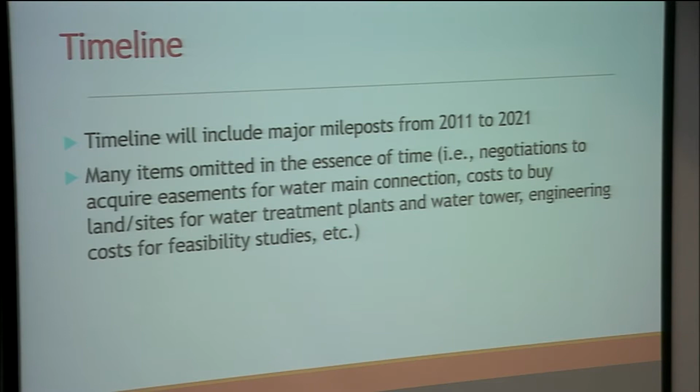So the timeline will be including kind of the major mileposts from 2011 up to the current date of 2021. I've omitted a bunch of stuff in here, and it's not that it's not important, but it's just not the major mileposts, you know. Dollar amounts that we spent to buy land for where the water treatment plants are and that kind of stuff, feasibility studies. I kind of passed over all that.

We did an update to the comprehensive water plan back in July of 2011, so virtually 10 years ago. And at that council meeting in July, I just did a screen grab of one of the maps on there. It shows a couple of things. It shows a water treatment plant, a well, and a water tower in the southwest part of Minnetrista, not actually too far from where we ended up. And it also shows a future water treatment plant on Kings Point Road, which eventually did get built.

Let me get this up here. Will you be coming back to that? I can, but we'll see. We just started. Is there a connection between that proposed tower for St. Bonnie and the one that's on Kings Point? This is not about St. Bonnie's water tower. No, there's no. This is the city of Minnetrista's proposed water plan update back in 2011.

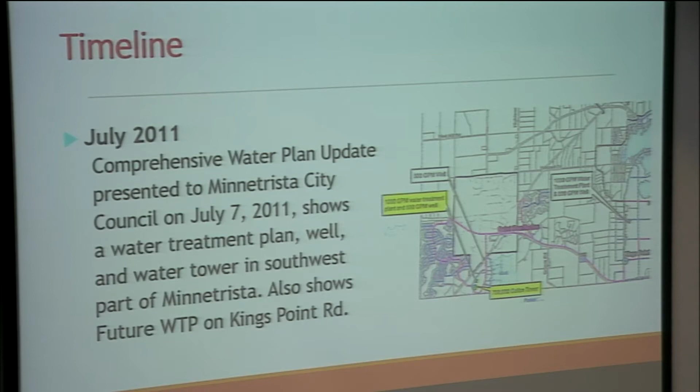It did show that we were, I'm not trying to. Yeah, no, but I'm just saying that was our plan all along, to build the stuff that you see going in down there right now. And we did talk to St. Bonnie at a certain point in time, and they were not interested in working together on water infrastructure. Well, I'm on the city side. I knew some kind of connection between the St. Bonnie water tower and the city.

Let's go through the presentation. Yeah. That's okay. I understand. Yeah, then it may become a little clearer as we move forward. Yeah. And if you still have the question, let us know.

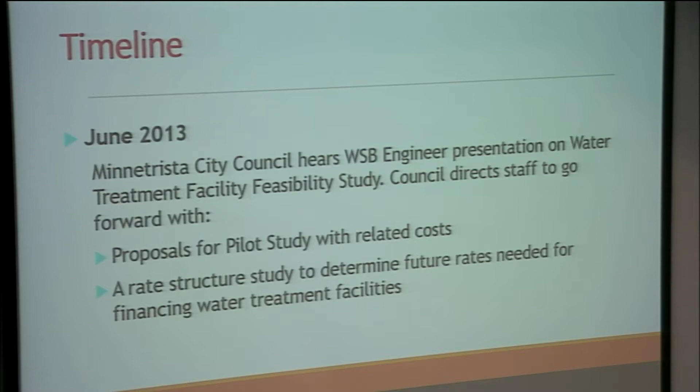So in June of 2013, the council heard from WSB engineers at the time that did a presentation on the water treatment facility feasibility study, and the council directed staff to go forward with a pilot study and costs and a rate structure to determine how to pay for those future costs, which would be the infrastructure.

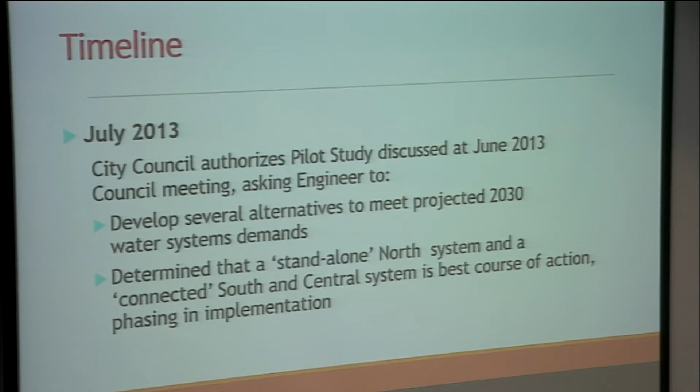In July of 2013, the council authorized the study discussed at the June meeting, and asked the engineers to develop some alternatives to meet the projected 2030 water system demands, and it was determined at that time that a standalone north system and a connected south and central system would be the best course of action, which is in fact what we did. There were a few twists and turns, as you'll see.

In 2013, for the north system, it was determined by the engineers that there was sufficient existing capacity and storage, and it could support itself. Whereas in the south and central system, there was a need for some additional capacity and storage overall, mostly due to firefighting. And those two systems were where we got most of our complaints on the drinking water quality.

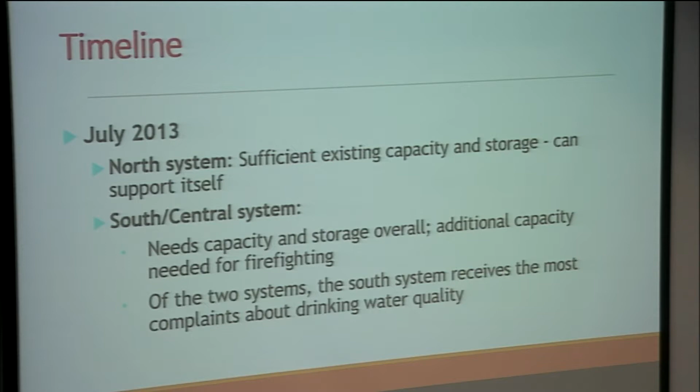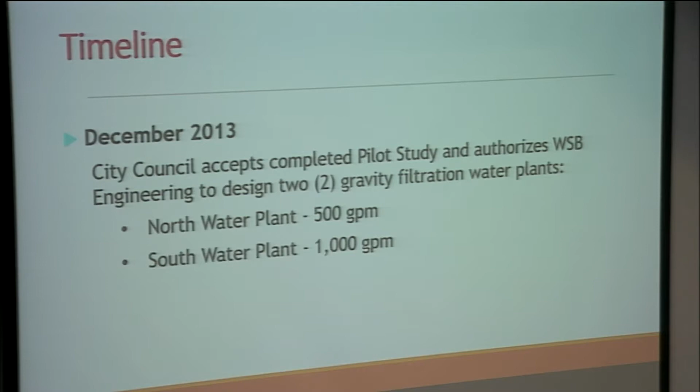In December of 2013, they accepted the pilot study and authorized WSB to design two gravity filtration plants, the north system and the south water plant being a little larger.

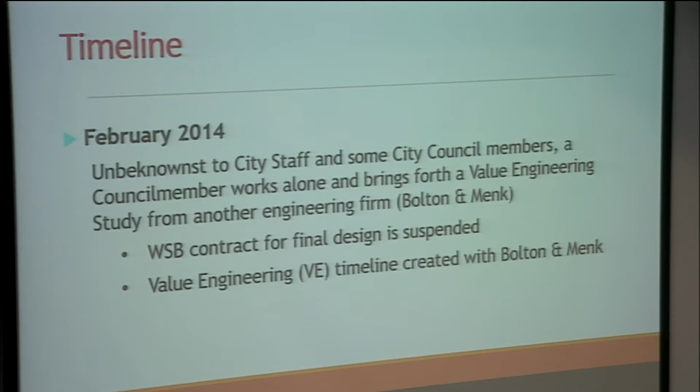And then in February of 2014, unbeknownst to our city staff and a few members of the city council, one council member working alone brought forth what was called a value engineering study from a completely different engineering firm, Bolton and Menk. They suspended the contract for final design for WSB, and then the value engineering timeline was created with Bolton and Menk. And I'm purposely not delving into the politics related to that, but that's actually what did happen.

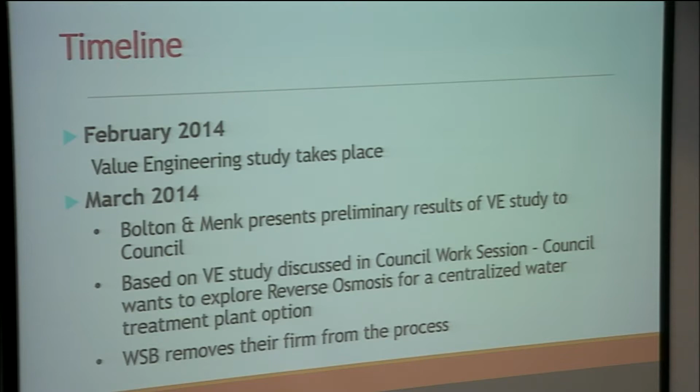So there was a value engineering study in February of 2014, and then in March they presented a preliminary results of a value engineering study to the council. And the council at that point decided that they wanted to explore a reverse osmosis plant for a centralized, which means one plant only. And it actually is going to be down the road from here at City Hall. And then at that point, WSB kind of removed themselves from our process, since they're our city engineer and still are, and they were tasked with the design and implementation of the water infrastructure, but like I said, a council member overruled that. We had an election in November.

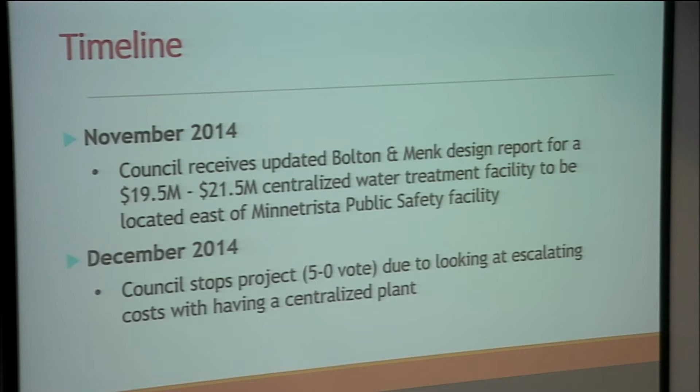The council during November also received an update from Bolton and Menk, and they were now reporting a $19.5 to $21.5 million centralized water treatment plant to be located east of the public safety facility here. But after the election of Mayor Whalen and 2 other council members, the council stopped the project because of the escalating costs, and I'll have something at the end about the costs. So in January, with a new council seated, they began re-examining the issue once again. And so the council decided to move forward with an RFP to deal with the city's water system improvements that needed to be done. And we started our search for a water tower site, which is important to note.

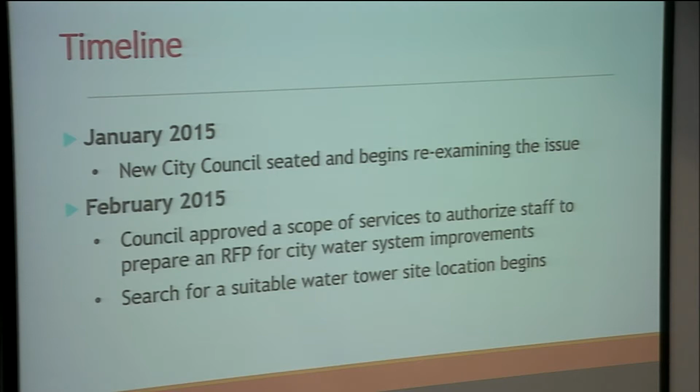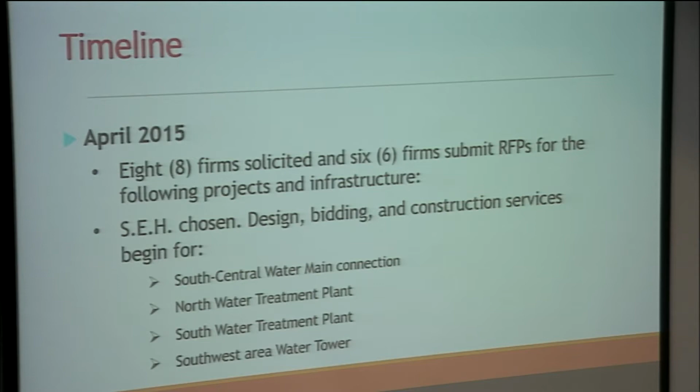So there were 8 firms that were solicited, 6 submitted RFPs for the following projects. SEH was chosen. They're still in the process of finishing up with them. This is 6 years ago. They did the South Central water main connection, helped design the water treatment plants, both the north and south, and then the current and final piece of the puzzle is the southwest area water tower that's going to be online here in fourth quarter. So in July of 16, the south and central water main was connected, and the cost was about $3 million, which included all the right-of-way purchasing, which was minimal since they were decentralized plants, not a centralized plant.

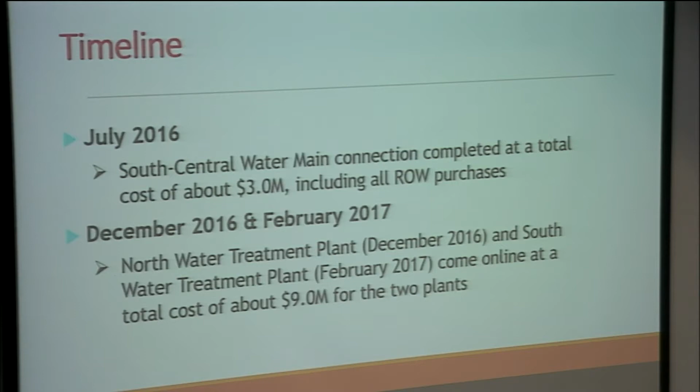In December of 16 and Feb of 17, the 2 water plants came on. North plant came on in December and the south plant in Feb. The total cost was about $9 million for the 2 plants, and those again were gravity filtration plants, not reverse osmosis. And we did have a delay in trying to find a suitable location for a water tower. That was difficult to do. David Abel could tell you more details about that, but in general, we explored many different sites.

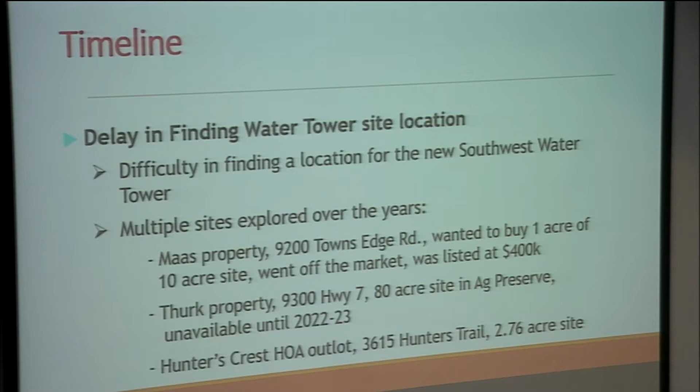One was the Maas property. We wanted to buy an acre there. It was listed at $400,000 for that 1 acre. The Thurk property was in what was called Ag Preserve, and it wasn't going to be available. This is back in 2017, so this is 5-6 years later. It wasn't going to be available for that long of a period, so that got ruled out. There's an outlot in Hunter's Crest, a 2.76 acre site that did not work out. Hunter's Pass, there was a property owned by the Klinkner family. They would not discuss selling a piece of their property with us.

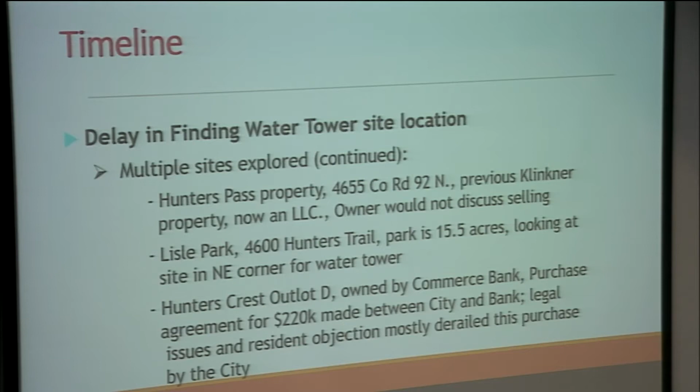Lisle Park was kind of our fallback position since we were getting frustrated trying to find a location. That's a 15.5 acre park. We really didn't want to use it, but if we couldn't find a spot, that's where we were going to put it. We actually had a purchase agreement with Commerce Bank, who owned an outlot called Outlot D. And because of some legal issues with the covenants and the Hunter's Crest HOA, and also some intense resident objection to having to live near a water tower, that purchase got derailed and we did not go through with it. We finally did purchase a tract of land at 9400 Highway 7. We bought a 2 acre site and it cost us about $100,000.

At that point, we began the construction of the water tower. One of the most important things about building a water tower is painting it, and depending on when you start, you may or may not be able to avoid the winter break. We were not able to. So it was 27 total months. It's actually 20 months of construction, and we had to sit out 7 months from November of last year to May of this year, where you can't do anything for painting, et cetera. So that water tower will go online at the end of October, and it'll cost about $2.5 million.

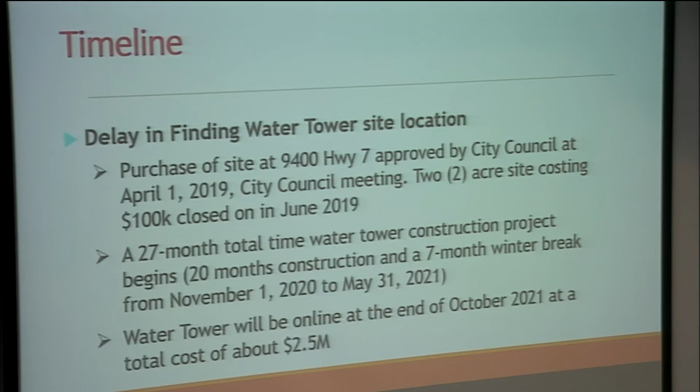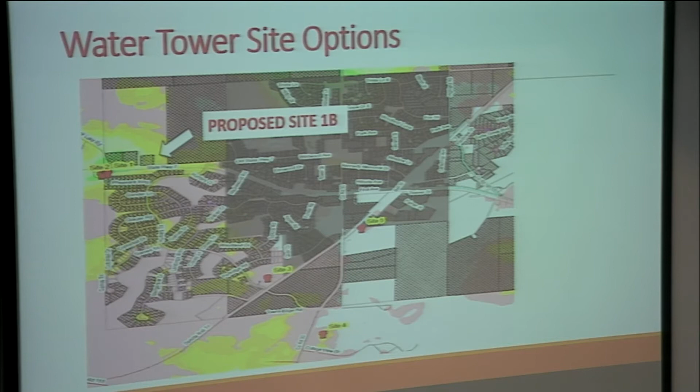This is just kind of a graphic. You can see there's proposed site 1B, right next to 1, and then you've got site 3, site 4, site 5. There was a whole bunch of sites that we looked at. That's actually an aerial view of the current site.

These were the costs that the engineers provided back in the day. Site 1B is the one that got selected. As you can see, it was one of the two shorter water main connection lengths. That's in the second column there, only 1,100 feet, and that's important because there's a lot of cost to connecting the water tower with the water main.

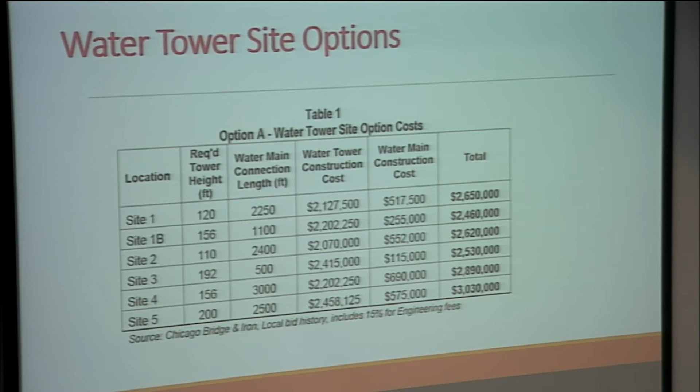And it was also only 156 feet high. The shortest connection was 500 feet, but the tower, based on the topography of the land, had to be 192 foot high. So it was actually the least expensive option, which is why we built and bought that 2-acre site. And this is just some options. The most important things are the land availability and proximity to the 12-inch trunk main. And you can see the X's on those two that were the two lowest cost ones.

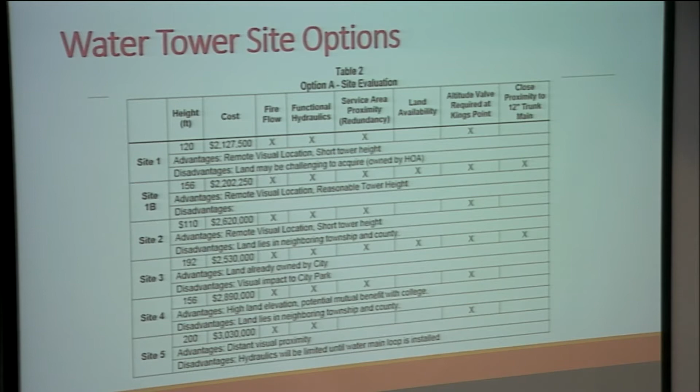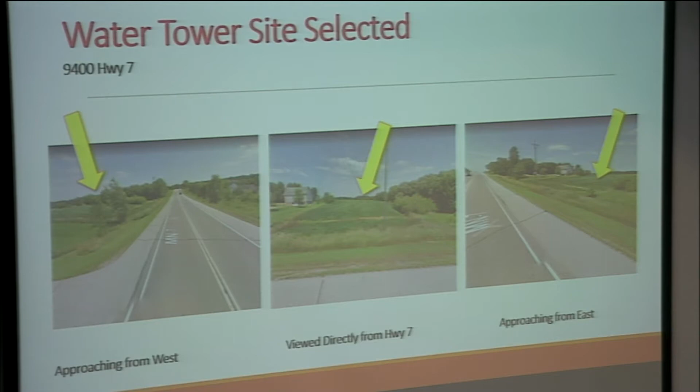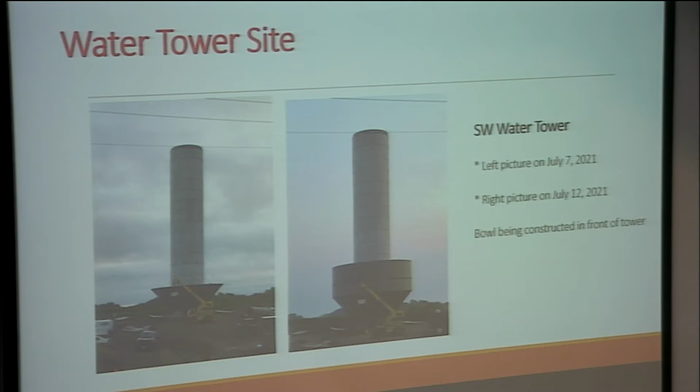This is just 3 pictures of it approaching from the west, directly dead on, and then from the east of where the water tower is now being constructed. This is a look as of about a week or so ago. The left picture, you can see the cone, the top is being built on the ground, and that'll be raised up here sometime in August and put on top of the tower.

So I did talk about cost a little earlier. The original plan before 2015, which is when the new council was seated, was a centralized water treatment plant. That was 19.5 and growing to 21.5. We didn't really know the cost of the right-of-way acquisition, but it was going to be quite expensive because you'd have to buy right-of-way between a lot of different parcels to get all this stuff down to one location, whereas we're using 2 locations. That was a $24 million and growing price tag, and the current plan is at $14.5 million.

Again, the water tower is going to be built on both plans, but in general, it was the cost of building the plants. So council made the right decision. That was our original intention back in 2011, which is where I started this PowerPoint. And again, like I said, there were a few other people that wanted to do something different for a while, and it basically just came out that it wasn't the right thing to do financially.

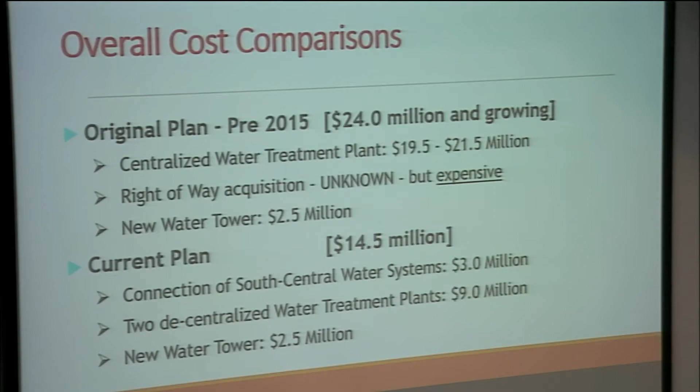So that's what I have as far as a PowerPoint goes, to give a quick historical background of our water infrastructure. At this point, I'm going to ask Allison, and Greg eventually is going to jump in here and talk a little bit about the water supply and treatment and where we're going. So you know where we've been and where we're at today, and now where we're going is the next steps. Allison?

Thank you, Mike. Madam Mayor, members of the council. This evening we have Greg Johnson. He's the director of our water wastewater group. I asked Greg to attend this evening; he and I both felt it was really important to have his expertise at the meeting. I can provide an overview of how the city plans for water infrastructure, the process to look at where we're at with our water supply. But Greg's really the expert in this, and he'll be presenting part of this this evening to give the council a background on some of our projections.

So moving forward, I wanted to give an overview of what this presentation will cover. We'll take a look at the south system and what the city has as far as water plans. There are a couple documents that we reference regularly for infrastructure planning. We'll look at some of our recent water usages, as well as the restrictions implemented this summer, and talk a little about the impact of weather. Then Greg will take over looking at supply and infrastructure trigger charts, what consumption has been to date and the projections for the next few years as far as infrastructure needs in the city.

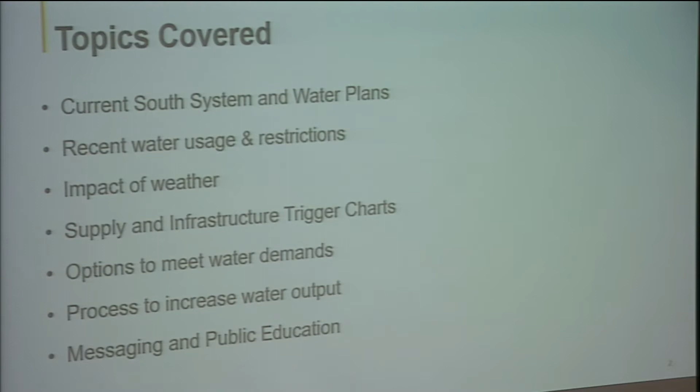And then we'll move on to look at some options to meet the demand of the water, the process to increase the output or to increase the amount of water into the water system to the residents of Minnetrista. And we'll talk a little bit about messaging and public education to the residents of Minnetrista. So this is the south system.

You can see it generally lies in the north and south Saunders areas, where well 5 is at the top of the slide there. That well came in service in '99. Once the south tower and water treatment plant came online, that well has only been used as a backup, and that's typical in a city. So we have both well 4 and 5 as backup wells. And the reason that they're backup is due to aesthetic issues. So they're higher in iron and manganese.

And so while they're safe to drink, any color in the water, any odor, any taste is not palatable to a lot of residents. And so the city identifies that, yes, that's not palatable, so we'll use those as a backup in an emergency. Again, the challenge is that when those don't go through the water treatment plant, they're not treated for that iron and manganese, it generates a lot of calls from residents, and so there's a balance with that. We also have well 3 within that system. That's off County Road 44.

As Mr. Barone pointed out, we have the new water tower under construction, and then the Kings Point Road water tower and wells 6 and 7 at the water treatment plant site off Kings Point Road.

Just a quick question. Is this new tower a part of the system or not? Yes. And it's in St. Bonifacius, right? No, it's in Minnetrista. It's in Minnetrista, yeah. I'm seeing St. Bonnie there and I'm wondering. Yeah, Minnetrista surrounds St. Bonnie. So you have to go through St. Bonnie before you get to the water tower. I was given to understand earlier that that wasn't going to be a part of the system. No, it is, yeah.

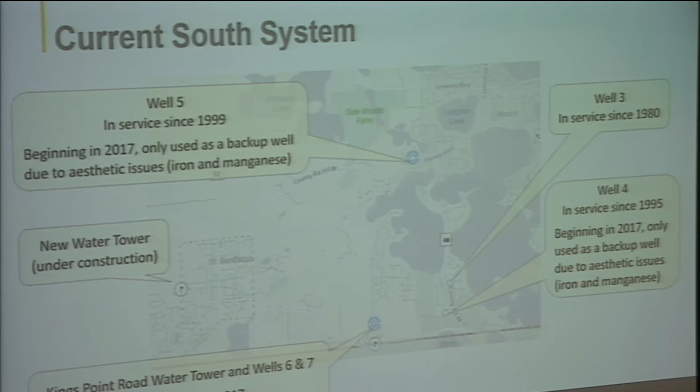So when we look at the planning documents that the city has in place with regards to water infrastructure, there are two components to that. One is the comprehensive plan, which was recently updated. And then we also have a water supply plan. And both those documents look at the city's growth, so where the population is at the time, and the projected growth, both with city staff and Met Council. And we look at that information to make some projections on what type of improvements will be necessary and when.

So we look at, for example, an average daily demand. I was thinking about this earlier today: your electricity use in the winter is a lot lower than it is in the summer because you don't have your air conditioner running. So likewise with a water supply system, you have your average demand, which is what you would use for showering, washing, etc. But then you have a peak demand that comes up in the summertime, and that's when we have irrigation. And so when we look at average versus peak, you have a multiplier from your average to get to your peak, so that we can plan the water system.

So as I mentioned previously, in the comprehensive plan and the water supply plan, we were looking at the use of wells 4 and 5 to help during those peak periods when you have a lot of people irrigating and it's hot. However, with the dissatisfaction with that water quality, there's a lot of challenges in bringing those wells online. In fact, I didn't bring it in here, but I had one of our public works employees today bring me a sample from well 3, which is the better well of 3, 4, and 5, and it was cloudy. And again, it's safe, but it's a palate issue with the consumer of the water.

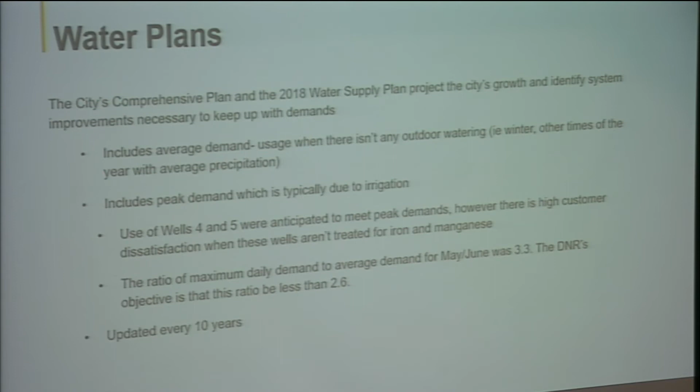So when we look at the difference between an average day and a peak day, in Minnetrista we were seeing this year a 3.3 multiplier. So at our peak, we were seeing 3.3 times the demand for water in the spring than in the winter. When we look at our water supply plan, which goes through the Department of Natural Resources, the DNR's threshold says that you should be around 2.6 for a multiplier. So we're seeing a higher than anticipated, per the DNR, irrigation demand on the city of Minnetrista system. So we look at those plans about every 10 years just to make sure that our projections are accurate and make adjustments as necessary.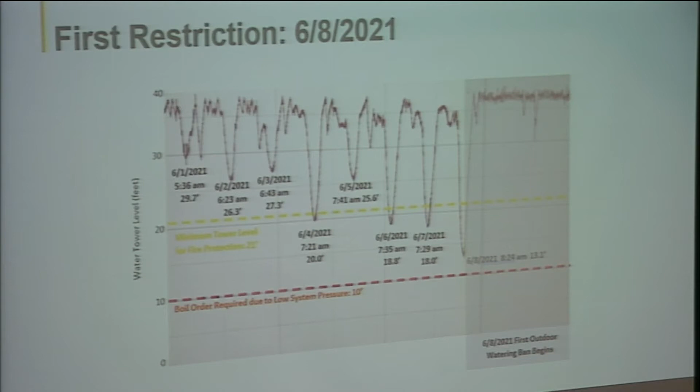Which tower is that? That is from the Kings Point Tower. So Kings Point is the only tower that serves that south system currently. And just for clarification, the south system also serves our central district. They're connected, so South Saunders area, North Saunders area, the Pinnacle Way, those are all connected to this system as well. Okay. Thank you.

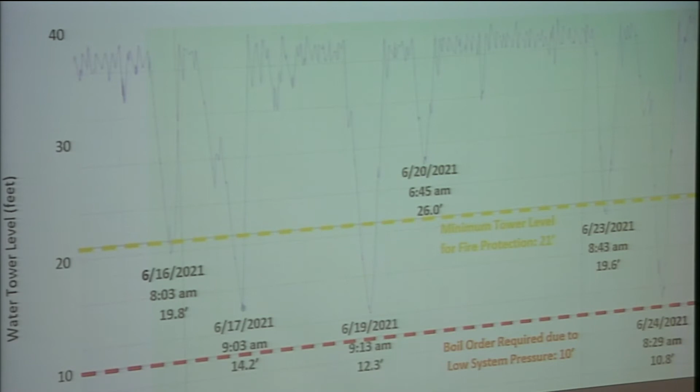Thank you, Madam Mayor. So this graphic, again, shows that threshold at 21 feet and 10 feet once we got the revised watering schedule in place. So the revised schedule, instead of allowing irrigation every other day, allowed each resident on the city system to irrigate 2 days a week. And what we saw is, again, the water tower elevations dropping below that 21-foot threshold. And then on June 24th, on the right-hand side of the screen, we saw it drop to 10.8 feet.

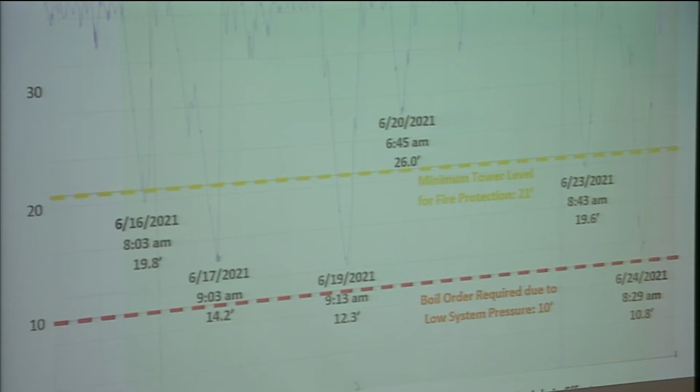And that's when the restriction went back on again based on what we were seeing for the demand on these towers. I can remember on the 16th, the first day that the modified schedule was released, Superintendent Peters texted me and told me what the tower elevation was only 7 hours after the restriction was lifted, and it had dropped significantly. Understandably, people were ready to start irrigating, but it dropped that tower elevation very significantly on the first day, and we weren't really seeing it recover as this graphic shows.

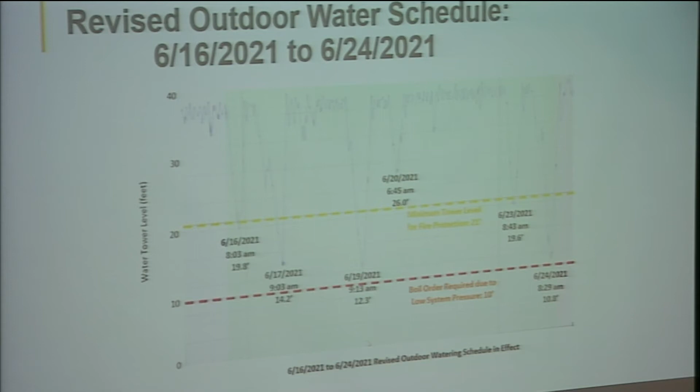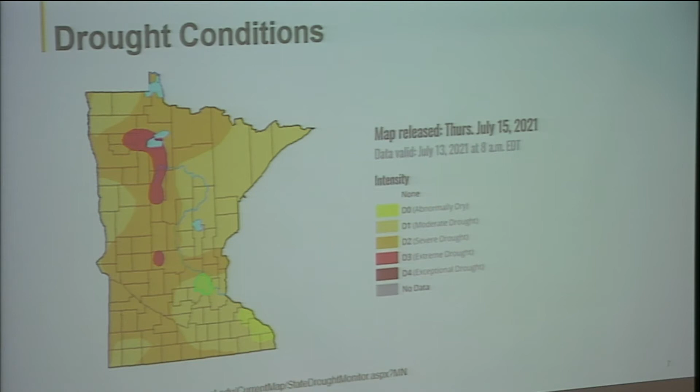So we are in a drought. This information was the latest that I found last week when I was putting the presentation together. The map was based on data from the 13th. I am not a meteorologist, but I can only guess that the drought conditions have expanded since we haven't seen any significant rain. But you'll see Hennepin County there in green. So based on this data, we are in what is classified as abnormally dry, with the severe drought in the darker orange starting to move into the northern part of Hennepin County.

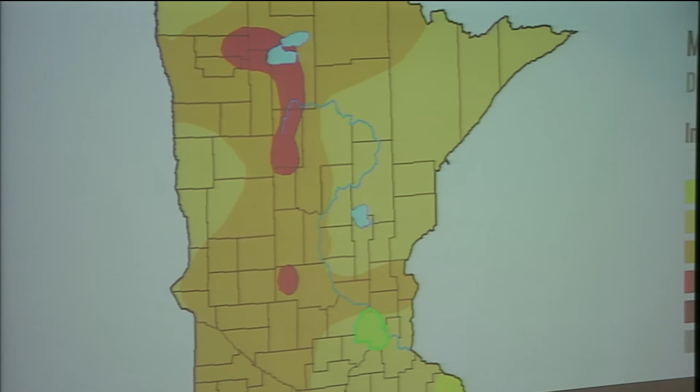So quite simply, our water system isn't designed for drought conditions, where we look at some averages, which most systems are. So when we look at that relationship between rainfall and water demands, we pulled this data based on actual city data. So the top line there is the city's water demand, and the bottom line is the rainfall. So over the past 4 years there, pardon me, we have 5 data points on there.

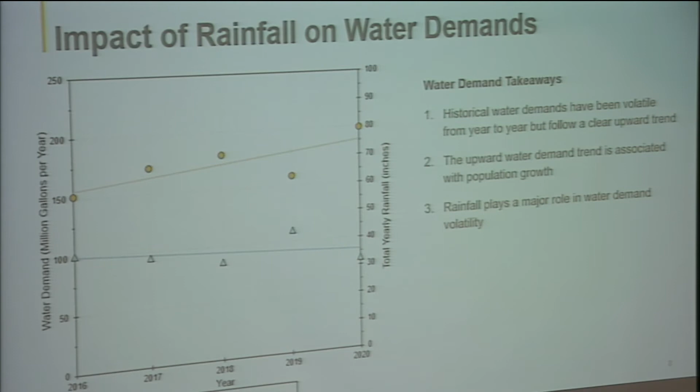You can see as the average rainfall decreased from 2016 to 2020, we saw the water demand increase, which again, you would expect to see in the drier conditions: more demand on your water system. So with this, I'll turn it over to Greg. He'll go through some of the trigger charts and looking at our distribution system.

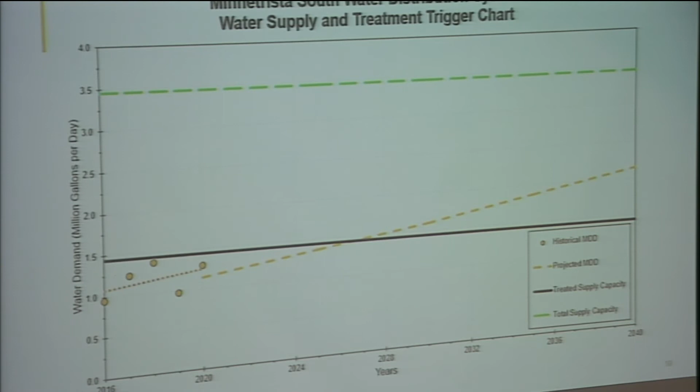So if you take the same chart and compare it to the city's comprehensive plan, if you look at that long slanted line at an angle on the bottom there, those are the projections that came out of the comp plan. You can see those are lower. So what that's telling us is that because of the lack of rainfall in recent years, these projections are shooting up at a faster rate. Now, unfortunately, we can't predict what the next number of years are going to be for rainfall. Nobody can really predict that. However, if we continue on that same trend shown on the lower left-hand corner there, we're going to exceed our capacity probably within the next couple of years.

So there are options to meet your water demands. The first one is to increase your treatment capacity. That's either expanding existing treatment or building separate water plants to treat some of the local or remote wells. The other thing is increasing your supply capacity. But one thing to keep in mind is when you're increasing supply capacity, you're always trying to achieve optimal water quality too. So sometimes expanding treatment and capacity go hand in hand.

And then the last important part of this is the messaging towards the public, and it gets on to education and water conservation. How do we do more efficient water irrigation? How do we water at the right times of the day to try to use less water?

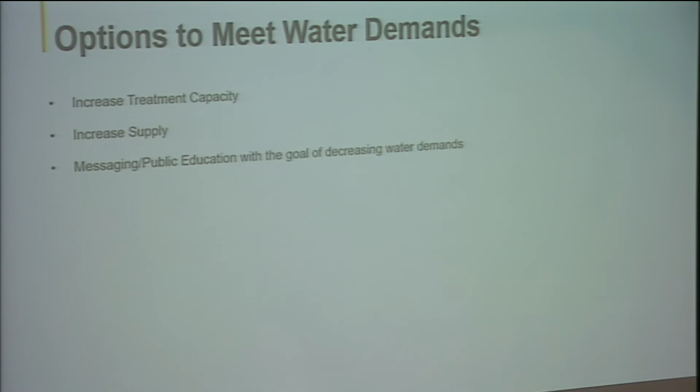So one thing that we would recommend the council doing is doing a further analysis of expanding treatment. And the first one we look at is expanding your south water plant that you just built. See if it's possible to expand that with additional capacity. The other option is to look at constructing a water treatment plant near the existing untreated wells. So those are wells 3, 4, and 5.

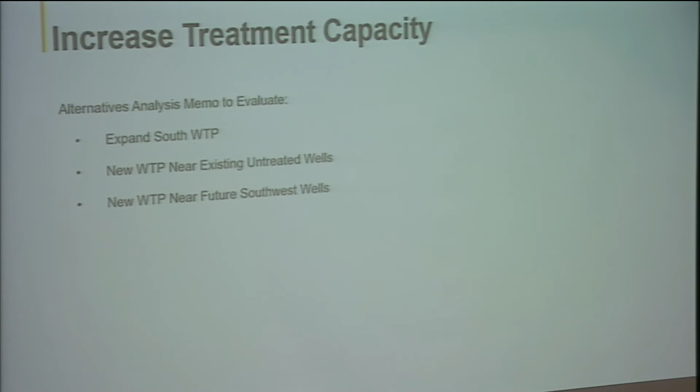And then the last one is constructing a new water plant near future wells. Ideally you want to have the wells as close to the treatment plant as possible, so it requires less piping in between those two facilities. I think that's why we drilled the 2 new wells by the treatment plants on Kings Point Road. Yeah, the well 5 and 6. Well, 6 and 7. 6 and 7, yeah.

So when you're planning for a well, there is a process you have to go through, and we actually went through it, remember, back when we were involved in the design of 6 and 7. And the first thing you have to do is construct a test well, so you can determine what the pumping capacity is in that location, and determine the water quality. Is it going to require treatment or not?

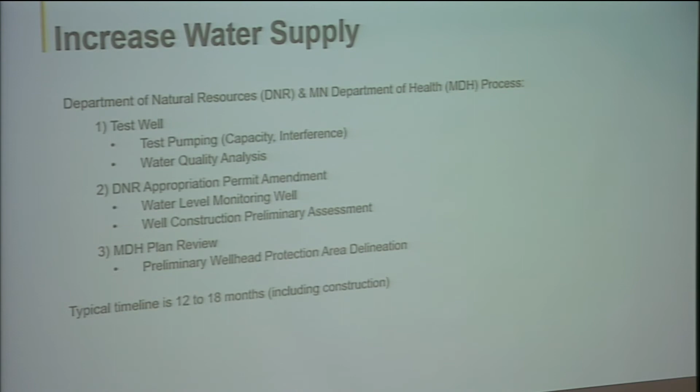And then the next thing, which is becoming more of a challenge today, is getting an appropriation permit from the DNR. And then the last thing, it has to go through the plan review for the Minnesota Department of Health. So if you look at that typical timeline, it's usually about 12 to 18 months just to implement a well. I'll pop back in here unless there's any questions.

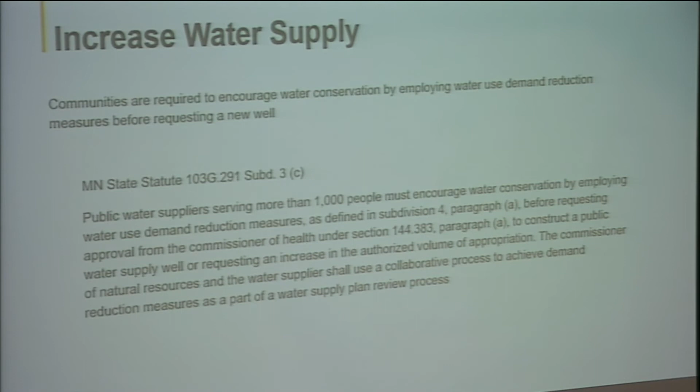I just have one question. So he said well 3, 4, and 5, and you just said 4 and 5. So 4 and 5, thank you for asking that question. So 4 and 5 are the 2 wells that have issues with the iron and manganese, and staff prefers not to use those as backup. But well 3 is used to supplement the water treatment plant capacity.

Yeah, and one thing is those 3 wells are actually all drilled into different formations. So well 5 is really a shallow glacial drift well. And then 3 is a Tunnel City Wonewoc well, that's the same as 6 and 7. And then well 4 is actually a Mount Simon well. So that's actually the deepest, I think, the deepest formation in the Twin Cities.

Yeah. And the challenge with that well is it does have restrictions as far as how much water you can pump out of it. And typically, it contains natural radium. So then you're possibly treating another contaminant.

The things you get to learn when you're on council, interesting.

So one of the components when we look at increased water supply, Greg had mentioned this, is you have to get an appropriation permit from the DNR. And I pulled this from the statute: before even applying for a permit to get a new well, the communities are required to demonstrate that we've encouraged water conservation and water use demand reduction, so that we've employed some public education components to reduce that demand on the system, so that we're not just asking for more water. We've done our best to educate folks on being good stewards of the treated water that we already have permits for.

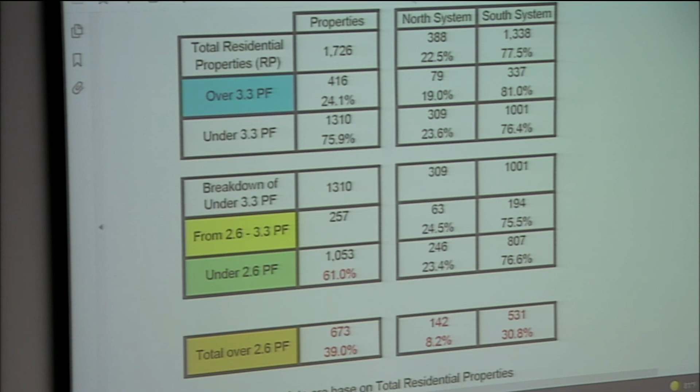So if you want to go to the next slide, Ally. There's one more if you click down. Nope, just, yeah, I guess you could scroll down, but there you go. You might have to shorten that up.

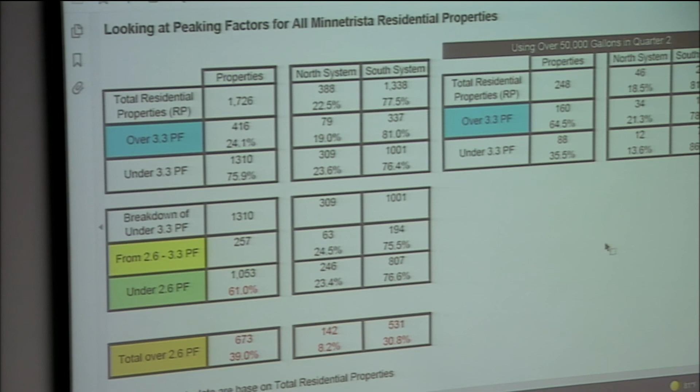So I added an additional column. And on the right, if you saw the tiered water structure, 0 to 25, 25 to 50, and over 50. So these are people or properties that are using over 50,000 gallons just in quarter two.

And so there's 248. Two-thirds of them are using over 3.3, and the rest are under that. So basically what we're saying is it doesn't really matter how big or small your property is. We're getting all shapes and sizes and all levels, but there are properties using a lot of water, and they're exceeding by far the peaking factors that are built in by the DNR

and what our current average is. So our goal, as Ms. Falsky mentioned, is to do some education. One of the things we'd like to do, not bore them with a bunch of graphs, but just tell them that we need to see what we can do about conserving water. I think people feel like it's an unlimited resource, and it's not. We're seeing that in some of those trigger charts that show the steady uprise in usage, and with the other information that was presented a little earlier.

We would like to identify all residents and give them some information, but we'd really like to target some of the people that seem to be using a lot of water and say, you probably don't have to. As Ms. Falsky had in that one slide, if you have a normal lot in Hunter's Crest or Turtle Creek, you can probably get by with 10,000 gallons in a month. We bill quarterly, so in a quarter that's 30,000 gallons. That puts you in the middle tier, plus your other home usage.

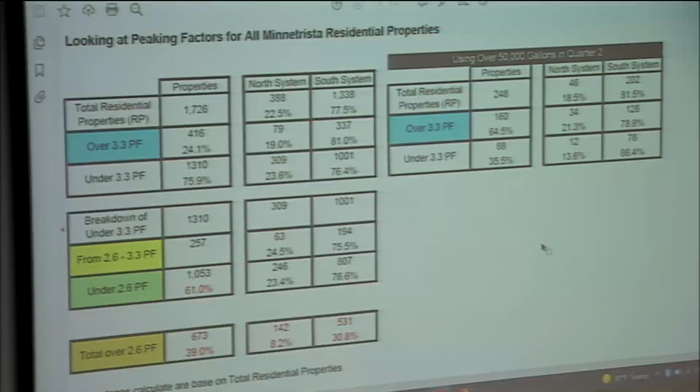Thank you. I just want to make a couple of clarifications, and then I'll open it up for questions by the council and maybe a few people out there. In answer to your question, I think it was a little confusing. St. Bonifacius is a separate city, and they have their own water tower and water system within their city boundaries. We have a new water tower, but you have to go through St. Bonnie because we completely surround St. Bonnie. The new one under construction is connected to the Kings Point water tower and that treatment plant.

The other thing I want to clarify: currently we have a DNR allocation based on the number of residents or water users on our system. When we go over that allocation, what happens? Do we pay penalties or fines? Madam Mayor, that's a great question. I'm going to ask Greg to clarify. Sure. Madam Mayor, there are penalties when you exceed your appropriation permit, dependent on your population and how much you exceed, so the rate can vary. I can't tell you exactly what it is for Minnetrista at this time, but there are penalties assessed.

I wanted to make that clear because some people in our city think, if I pay for the water, I should be able to use as much as I want, whereas we as a city cannot just keep pumping as much as we want, because we're allocated a certain number of gallons every year, and when we exceed it, we have to pay extra, and there are some serious fines. Also, as Ms. Falsky pointed out, when we need to drill a new well, we have to go through certain steps, and they look at our current usage as well. So for all those reasons, it's important to conserve and stay within our allocations.